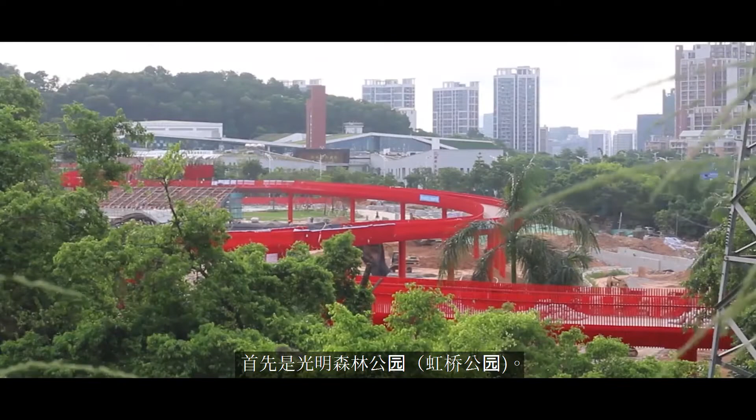For the last 7 years, we've been working with Lola and alongside our local partner, Land+Civilization Compositions, on landscape projects all over the world. By now we are working on 4 different park projects in Shenzhen. The first is a forest park in Guangming. We're also designing one of the most central public spaces of Shenzhen, redesigning Shenzhen's main waterfront at Shenzhen Bay Park, and designing an upgrade for Lychee Park.

I'll start by walking you through our vision for this project. We started by trying to understand the history of the area, how the city has grown and adapted, and how it's approached closer to the river and that heritage.

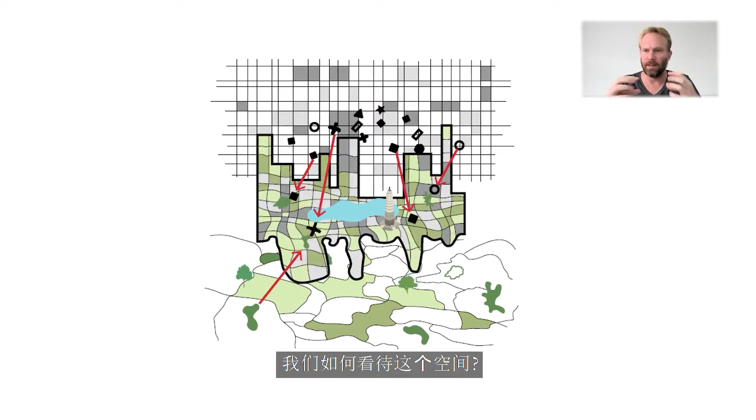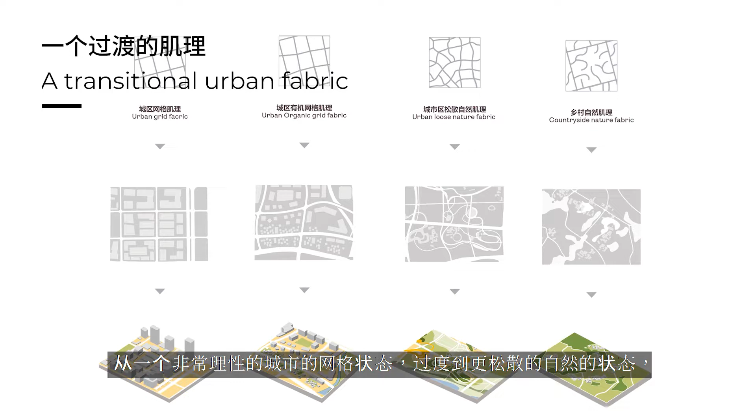Then the question becomes, as the city is starting to grow to the south, across the river, to the countryside, how do we think of this space? What should its character be as part of the city and as part of the world? So we start to think of how the fabric itself can change from a very urban, gridded fabric to something much more loose, like you would have in the countryside.

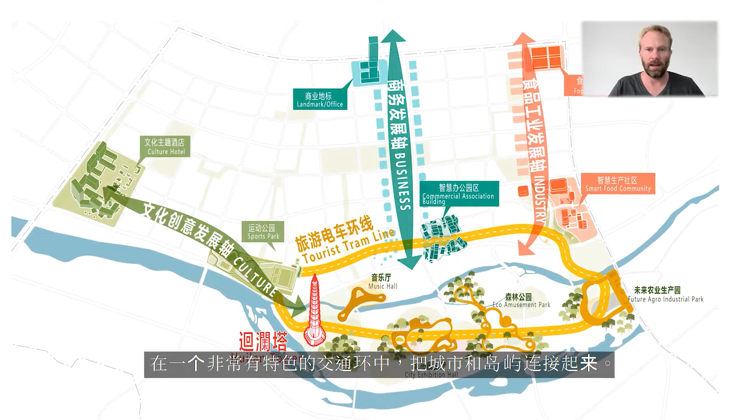But we still want to give a framework to this: key corridors in key identified industries and character, and a key loop for transportation and identity linking the city to the island. Then we have to think of it as a transitional urban system that allows this segue to happen in terms of the water, the open space, and the fabric itself.

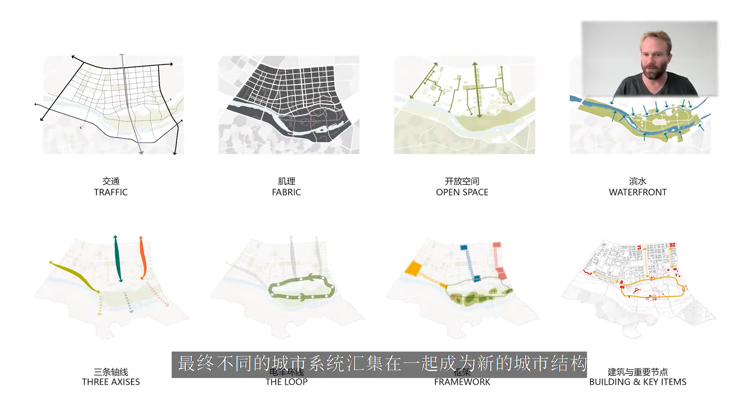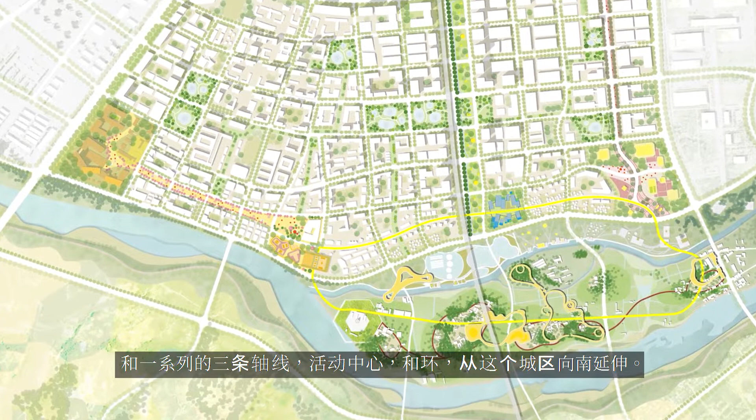This all comes together into a series of principles, and together you can see in our master plan how we think this can give a new identity and a series of key hubs and loops within the region as it extends to the south. Now, of course, the land use is associated with this as well.

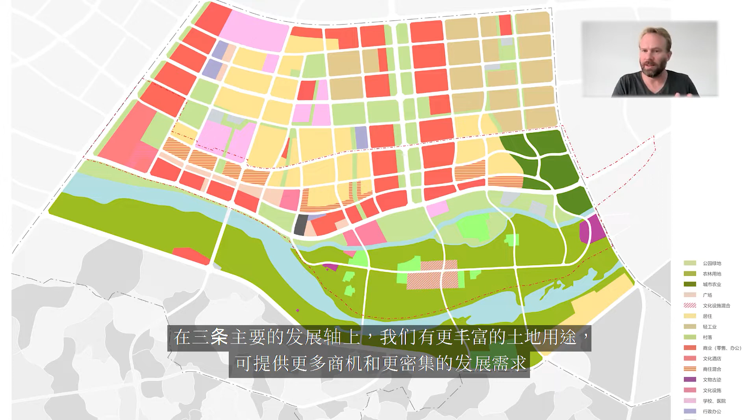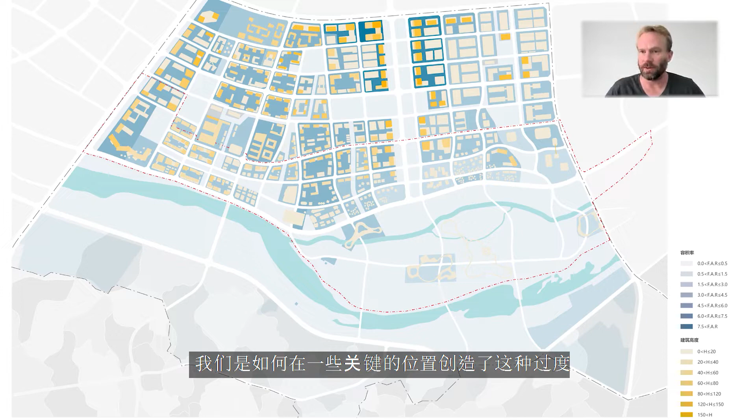In the key corridors, we have more intensive land use that can allow more business opportunities and more density, as you can see in the floor area ratio transition, focusing more intensity towards the transit corridors in certain key areas. You can see how this relates to the transport network, and we provide a new hub, a circular system.

This links a new tourist-friendly area and natural area to some of the new hubs we propose, as well as smaller pedestrian, biking, and train networks.

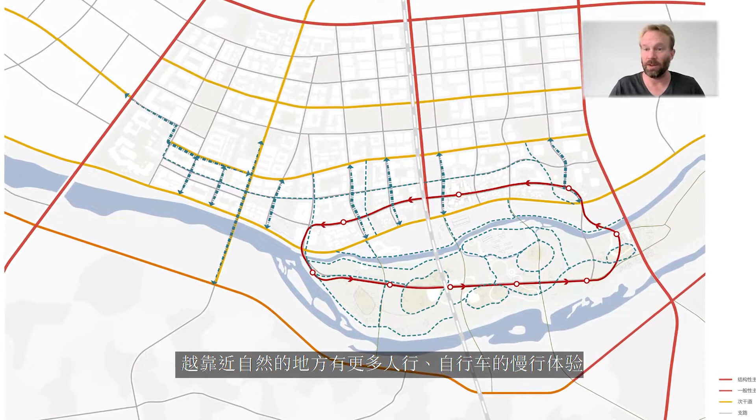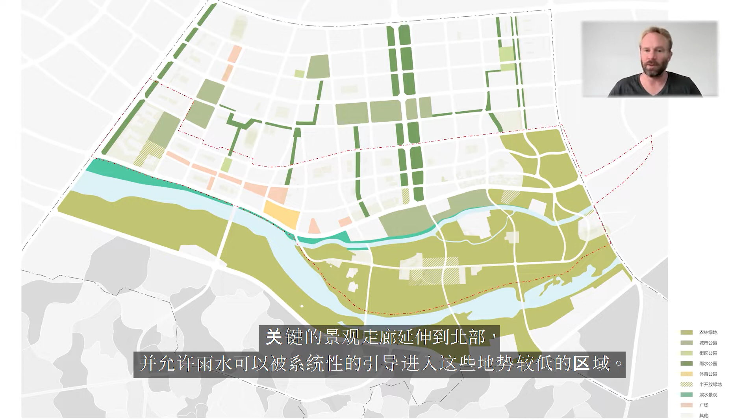The landscape transition also has much more of a strong ecological and natural system to the south, and key environmental corridors extend to the north, allowing water systems to come into those lower areas. So what we see is how we can start to think of a new kind of experience that supports tourism and the countryside, linking Lingpan and the food industry together.

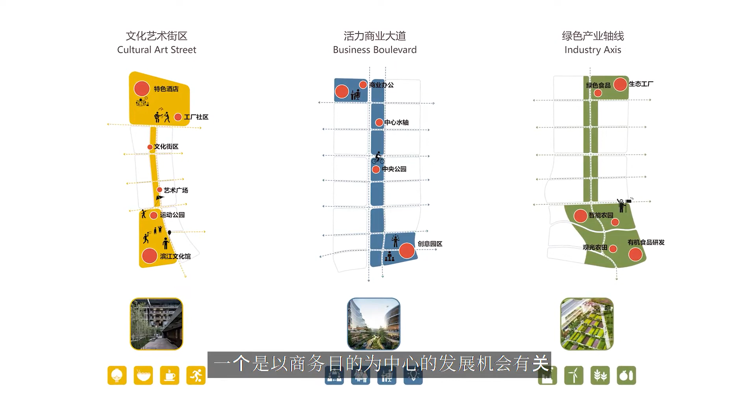These three developmental axes relate to notions of culture and the experiences of that, a more business-centered opportunity, and a more industrial area relating to being productive, including food and agriculture.

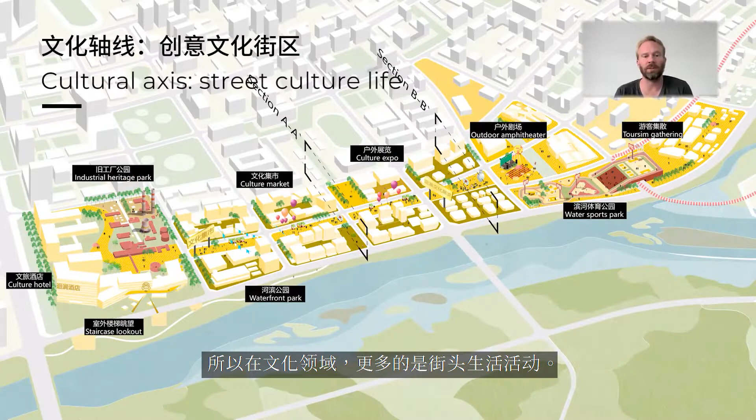Looking at the cultural area, it's more about street life and activities. We think of amphitheaters, culture markets, even heritage relating to industry, and a cultural hotel, all linked together in this corridor.

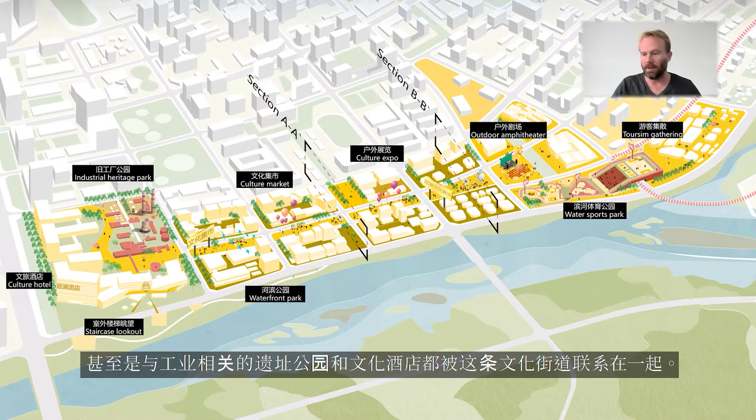You can see a flavor of it here, still a nice outdoor activity relating to the existing culture and providing new amenities as well. The business axis is a place for leisure, nature, and young business to start, still along a beautiful natural axis.

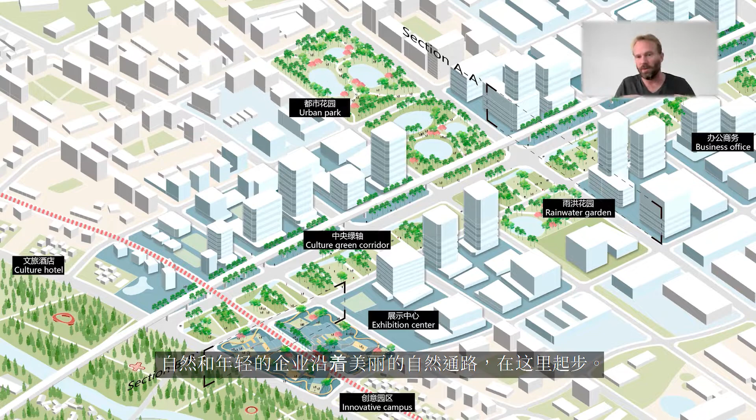You can see here with good transit, allowing people to move easily and still having new construction, but with respect for the heritage of the area.

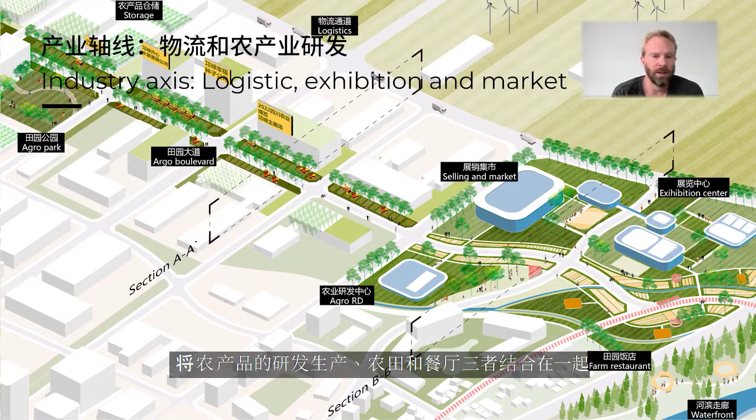The industry area involves logistics, exhibition, and market spaces to sell, R&D for agriculture, farms, and restaurants, all together in one space. You can get a character of it here, some new vibrant spaces, but mixed in with some idea of heritage, of how we can relate to traditional ways of dealing with the landscape and farming.

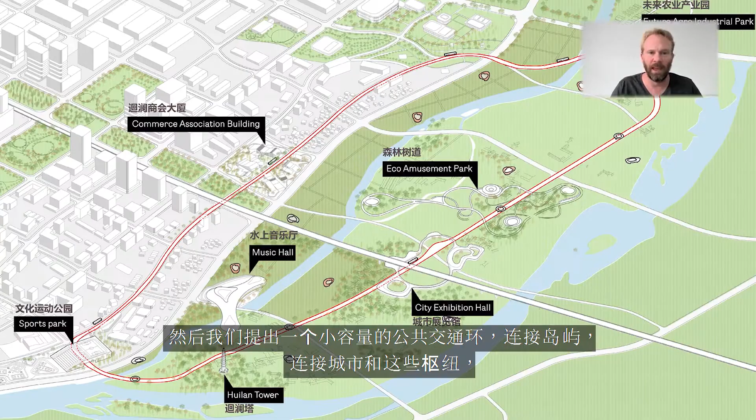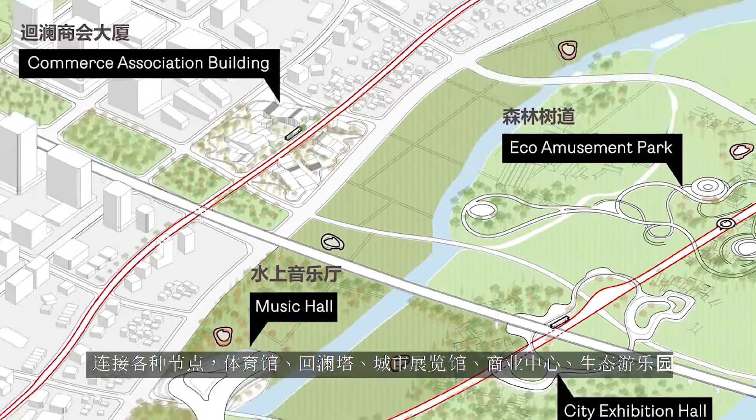We think of this as a low volume public transit loop, linking the island back to the city in these hubs, bringing together the sports hall, the existing tower, the city exhibition hall, commerce center, and eco amusement park, all in one easy loop to transition easily from one to the other.

The loop station design, we think of as a key series of stations that can provide identity along the way, both formally as architectural elements, but also as hubs for the community to come together.

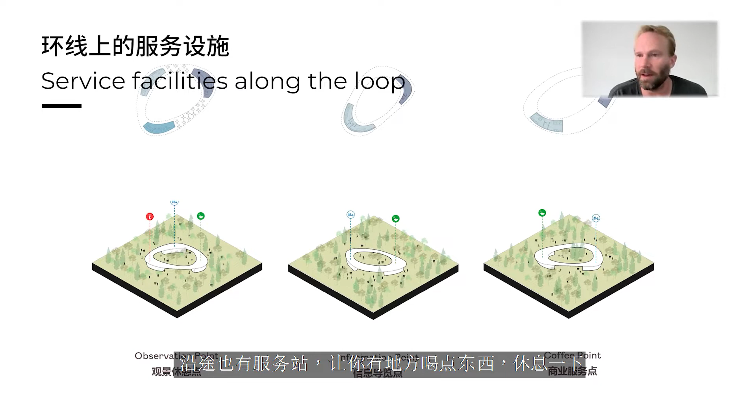And there's also service stations along the way to allow for a place to get something to drink, like a tea, or to get information as you move through the space.

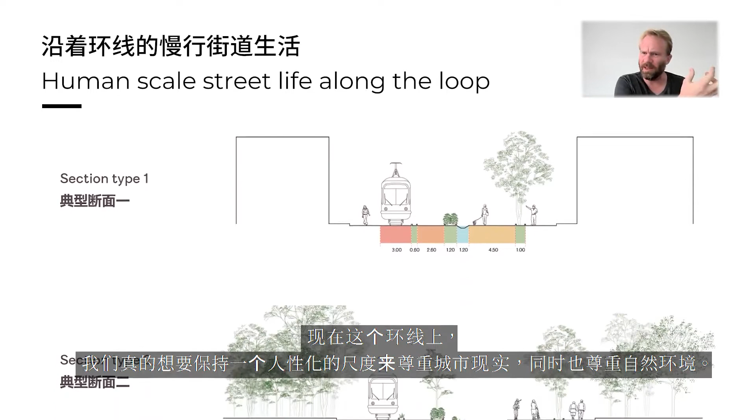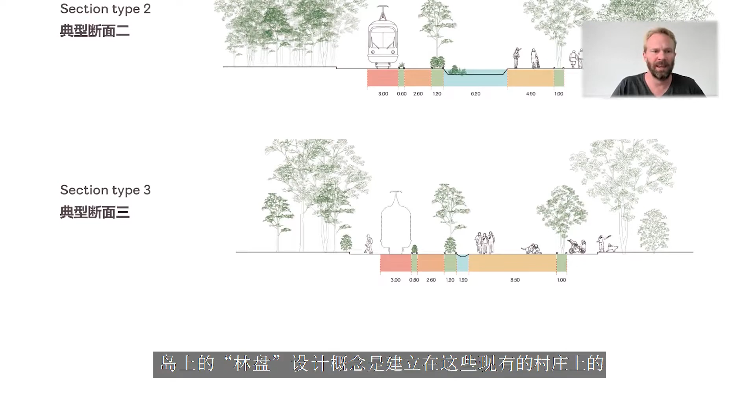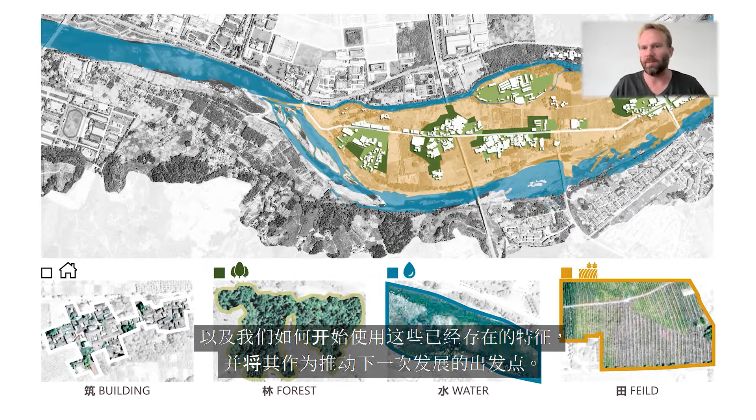Now, this loop, we really want to maintain a human scale to respect the urban reality, but also to respect the natural environment. So a sense of being able to feel very comfortable within a natural system or a more urban condition. And the Linpan concept on the island is building on some of the existing villages themselves and how we can use the character that's already there to drive the next phase.

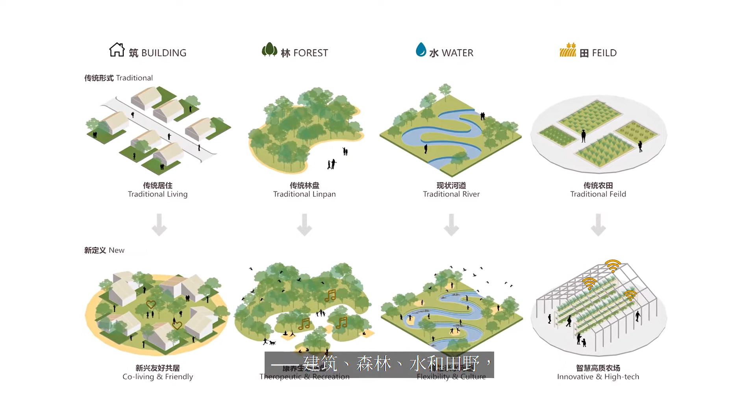So we reprogram the Linpan settlement and use different elements, buildings, forest, water, and fields as the character that both relates to the old, but provides a new vision for the area.

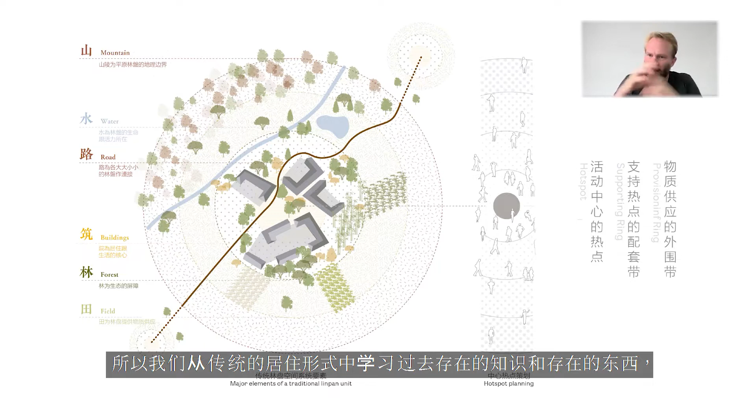And so we're learning from the traditional settlements and what has existed before, and how it has these offsets with a core area and a series of layers offsetting. This develops into our 4 clusters.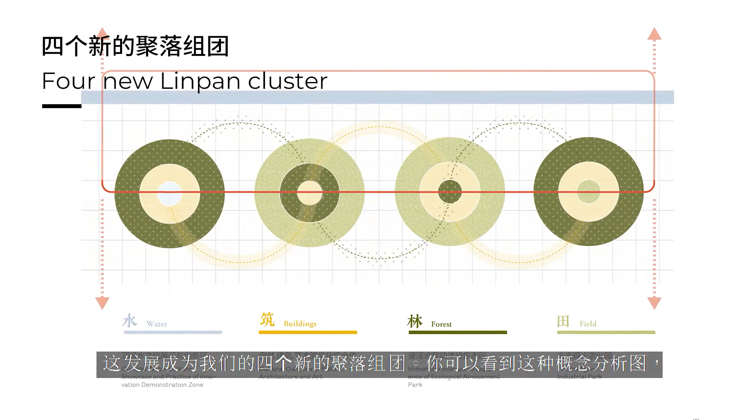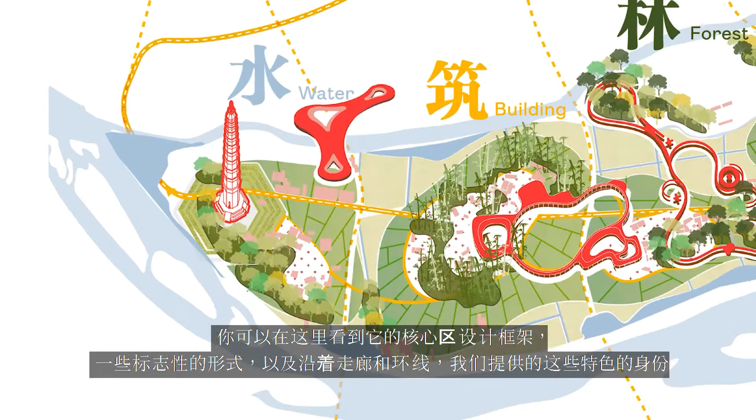You can see the conceptual diagram of how this comes together in these loops and these key hubs along the way. In the core design framework, you can see an iconic form about how we provide these key identity moments along the corridors and along the loops, all tied together to activate this area in terms of culture and nature history.

Now, we have these key thematic routes, some going north and south, some east and west, that allow quick and easy connection within a more local character, but also connect back to the city and to distant places as well.

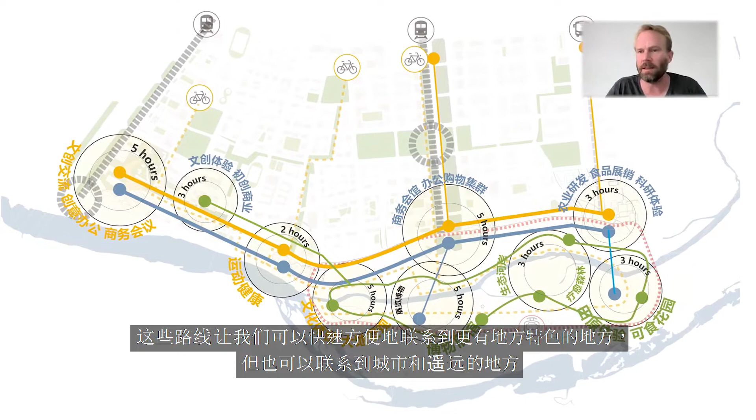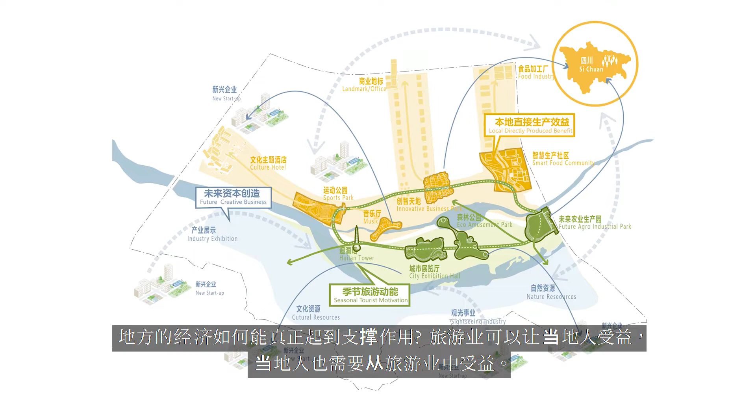And in the end, we're thinking about a notion of circular economy. How can this economy really be supportive? So the tourism can benefit the locals, and the locals can benefit from the tourism. It's self-sustaining, providing business for the area, and cultural experience for locals and visitors.

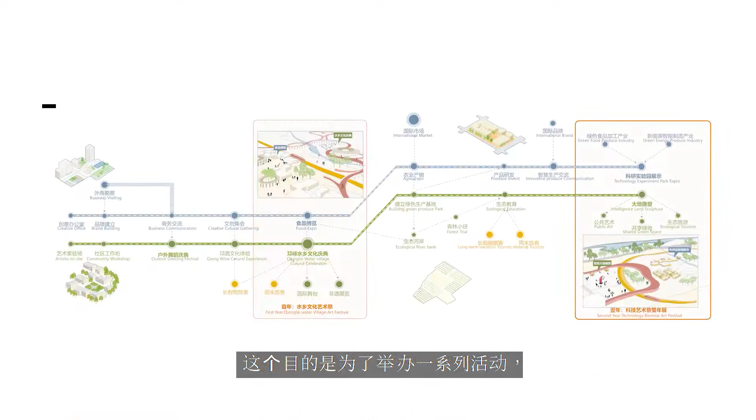And the goal of this is to host an event and to stimulate a synergy between the natural systems, the heritage, and the new business coming together, to think of it not just in terms of something built, but as events.

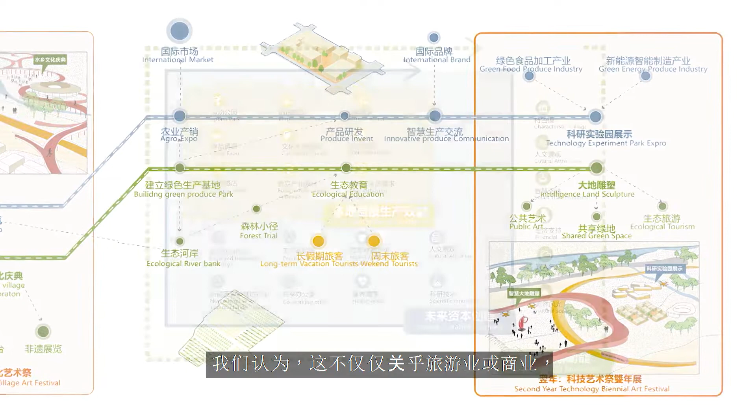And the different interests in different developments. By this, we think it's not just about tourism or business, but how these things can coexist together and support each other to add mutual benefit to all.

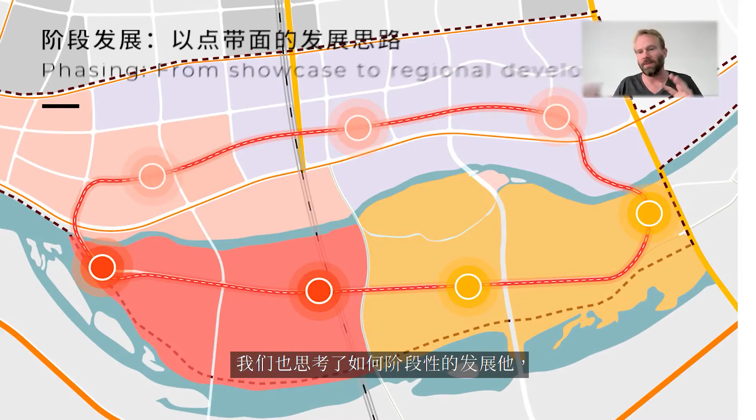And we think of how we can phase this. Obviously this won't happen in one step. It will need to happen a point at a time.

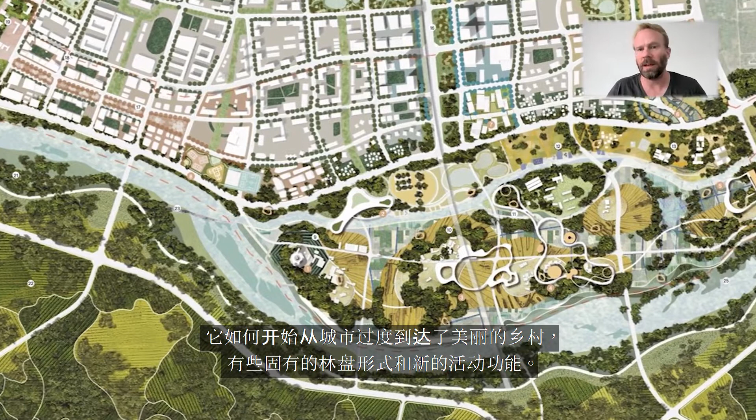Here you can start to see the master plan where this all comes together, these ideas of corridors and visions and gradients and forms, how it can start to look from the city to the landscape.

Now we're going to talk about the 4 clusters that we propose for the island. First, let's start with cluster number 1, which is all about the coexistence with water. It's about the relationship of the ground and soil with the surrounding rivers.

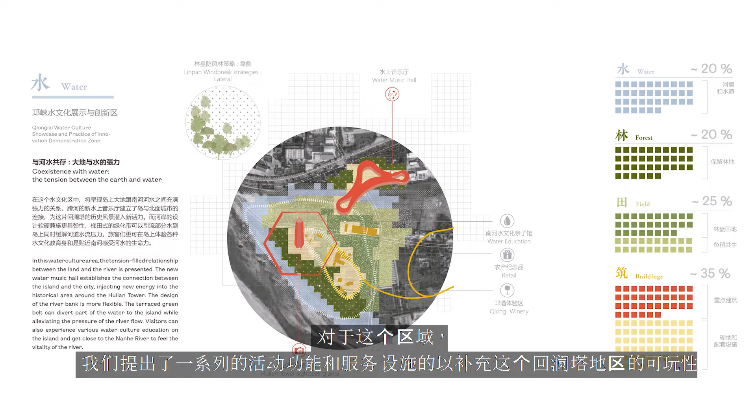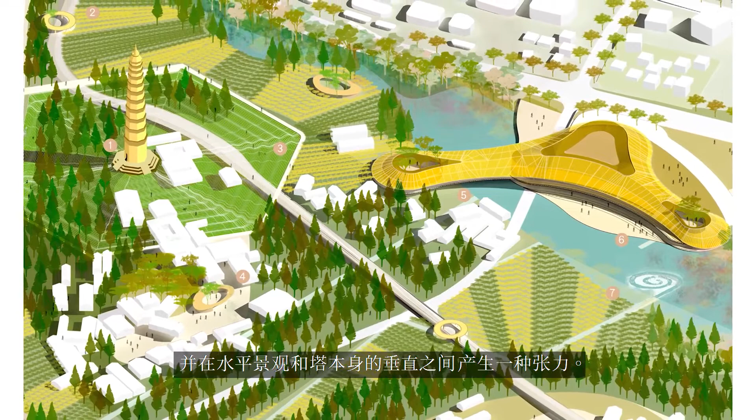For this area, we propose a series of programming that complements the Huilan Tower and generates a tension between the horizontal landscape and the verticality of the tower itself.

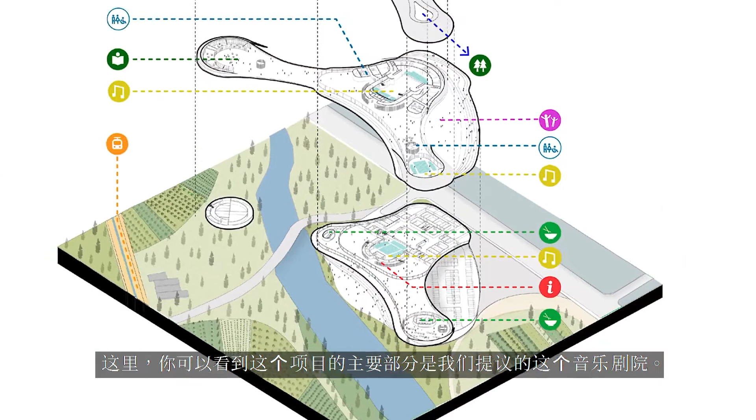Here, you can see that the main part of the program is this music theater that we're proposing. It's called the water theater because it has a direct relation with the river itself.

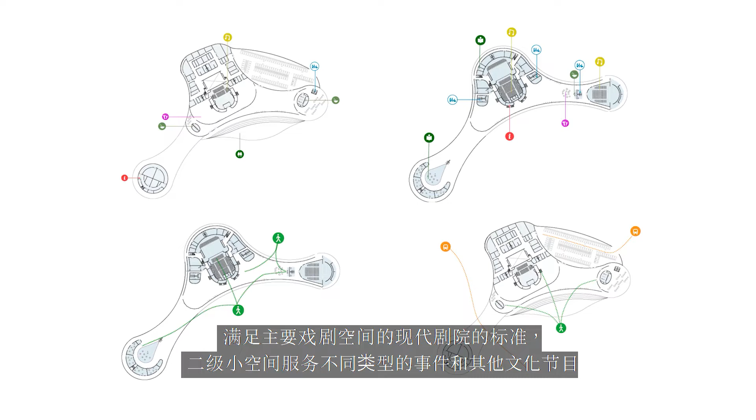And if we see the floor plan, it will give Qionglai 2 important venues: a main theater space with all of the standards of a contemporary theater, a secondary smaller space for different types of events, and other cultural programming that, as you can see in this diagram, overlaps with the river.

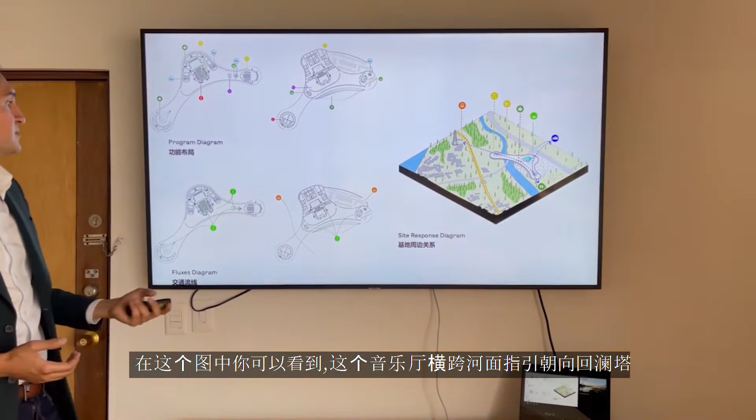It crosses the river and directs to the Huilan Tower as a certain bow to the architectural element. In the image, you can see how it generates an iconic landscape that doesn't seek to overshadow the tower, but highlight it in a better way.

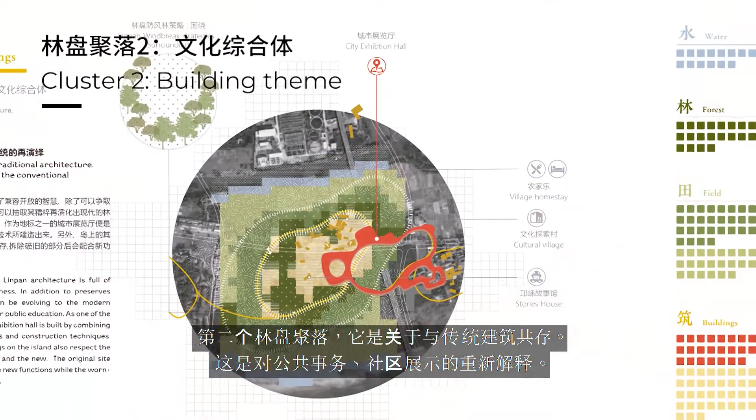In cluster number 2, it is about the coexistence with traditional architecture. It is a reinterpretation of the conventional. We do this by generating this covered loop that entices different types of programming, and through a series of buildings and courtyards that complement the two existing villages.

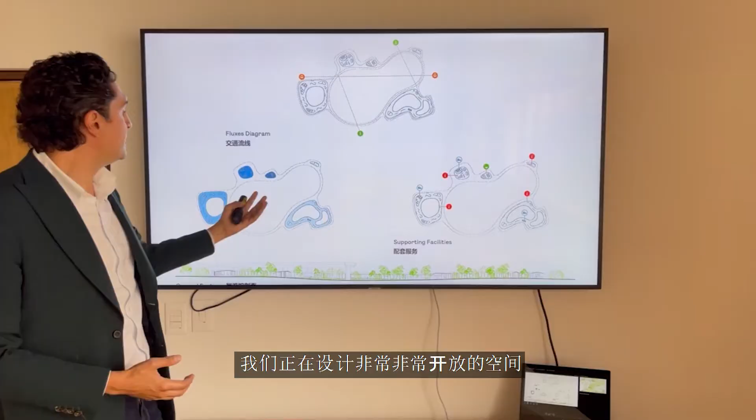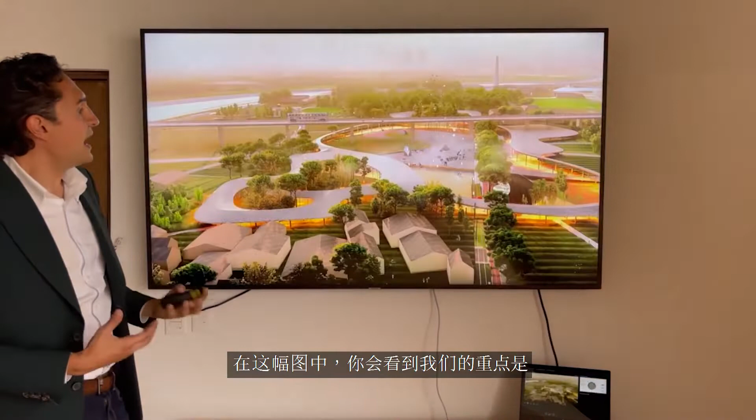Here in the floor plans, you see how we are designing very open spaces that seek to connect the different types of ambience that we have. Here you can see different buildings and how they relate to each other. And in this image, you'll see that our emphasis is about reinterpreting local culture in a contemporary manner.

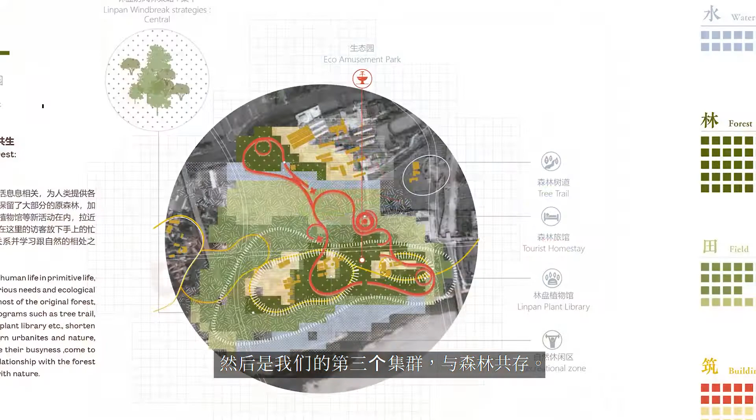Then we have the third cluster, the coexistence with forest. It's about humans and nature and the relationship with nature.

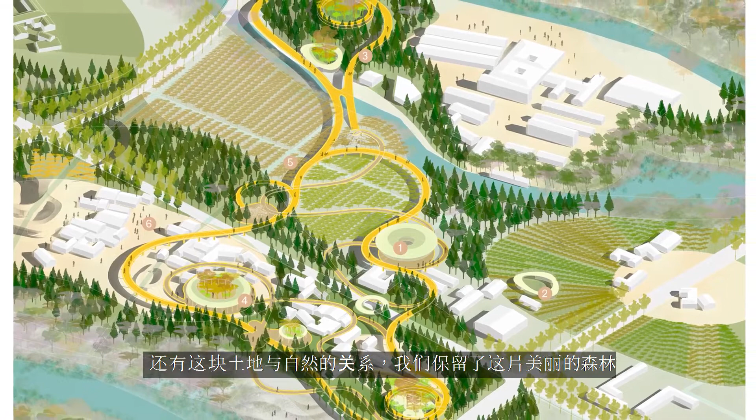Here we're keeping these beautiful forests that exist in the area and complement them through a series of elevated and round walkways where you can connect with nature and enjoy the landscape.

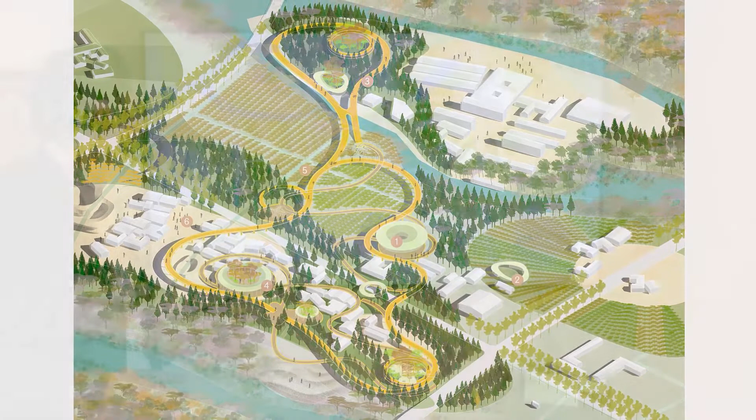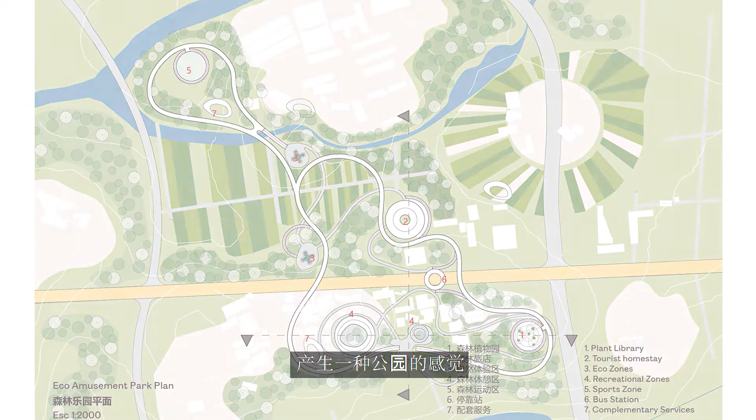Here you can see how these winding paths connect different pavilions and elements that complement the experience and generate the feeling of a park. We have recreational pavilions, homestay, eco zones, and libraries.

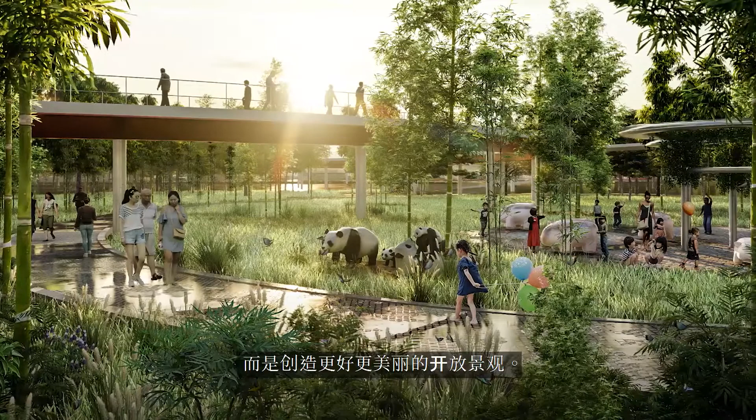Here you can see that we're not trying to impose buildings on the landscapes, but create better and more beautiful open landscapes. And finally, cluster number 4 is about the coexistence with the farmland.

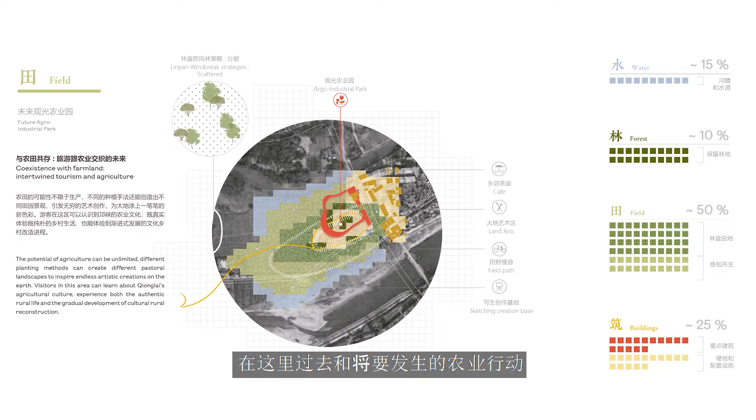It's about bringing tourism to agriculture so that they can learn and enjoy the current and new agriculture that will happen in Qionglai. Here you can see that we do this by designing a building and element that complements the existing road and then curves itself into the landscape so that visitors can actually see how agriculture is made.

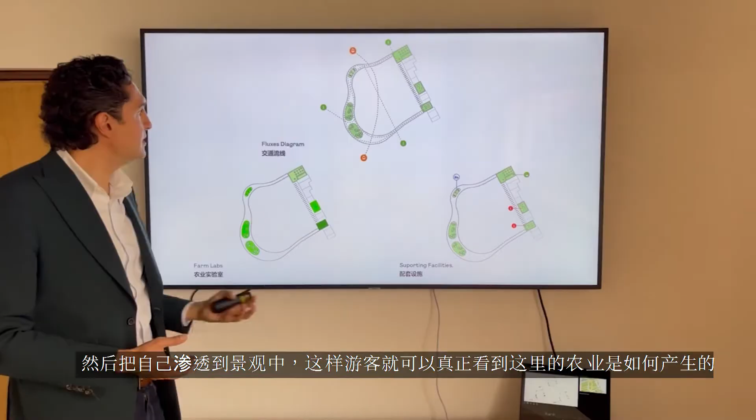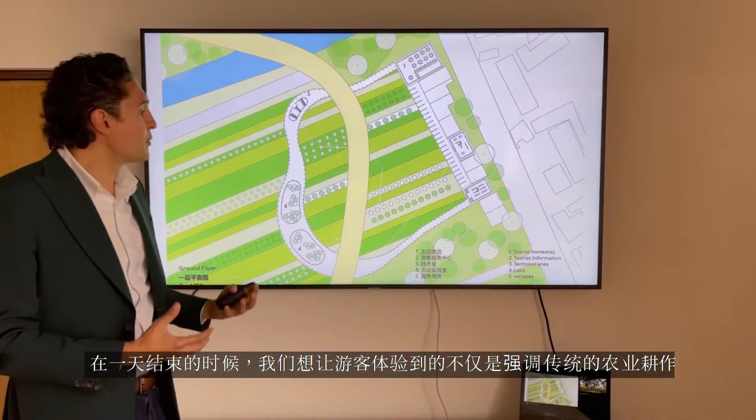Here you can see the different types of programming that are again very open so that we always have direct visual towards the agriculture. And at the end of the day, what we want is to have a visitor experience that not only highlights tradition but also enjoys, let's say, the advances of new technology.

Here you can see that the image shows a landscape that is very particular, that is iconic in itself, and that is complemented by this simple but elegant architecture.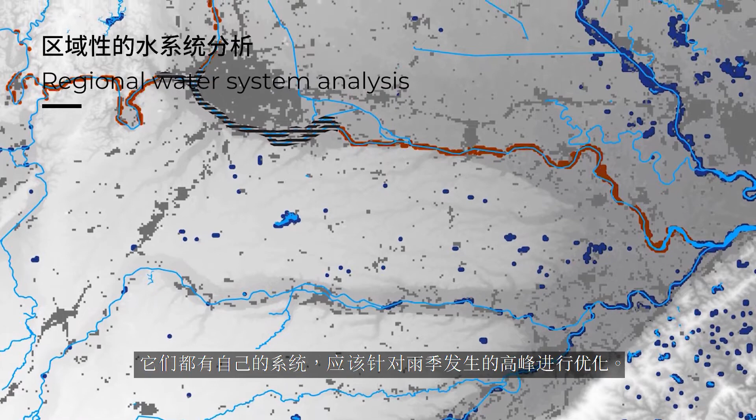If we look at the water system, we can make a division between river water and rainwater. They both have their own system that should be optimized for the high peaks that happen during the rainy season. Let's first look at the river water. For that we can zoom out.

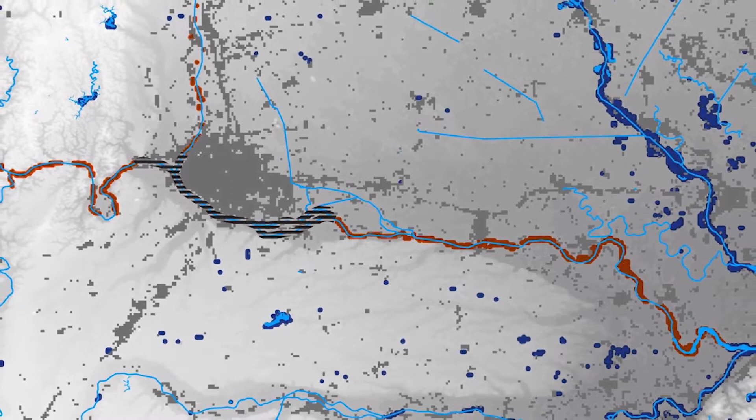Extra capacity for buffering the high peaks is needed. And we can find that space both upstream and downstream in the natural floodplains in the agricultural areas. And therefore we propose not to find that space within the city limits and focus purely on water safety and use the natural dynamics of the water for ecological quality and use the infrastructural interventions for a new leisure network.

In order to make the urban rainwater system as resilient as possible, we've looked at the natural topography and we reserved the lowest areas to temporarily store water during the rainy season. We connect this to the system of pipes and pumps that the city is already realizing. The effect is a meandering blue-green network that contrasts with the grid of the city.

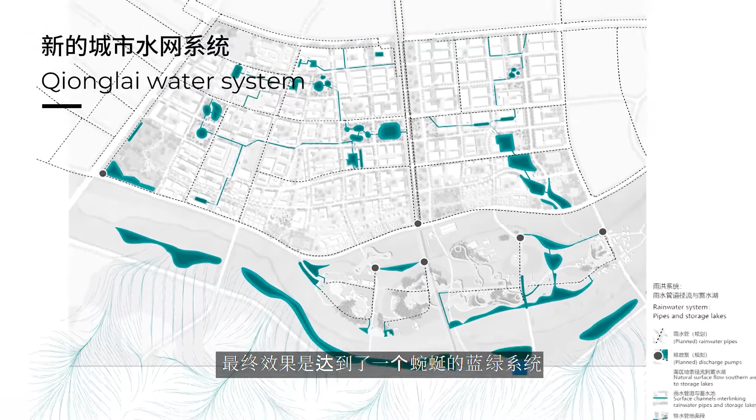All in all, the diversity and the dynamics of the water network in the river, the canal and the urban areas is forming the basis of all public spaces and landscapes in this urban development.

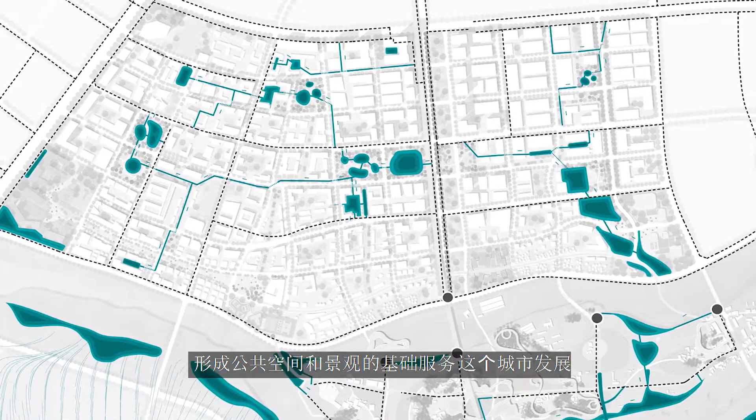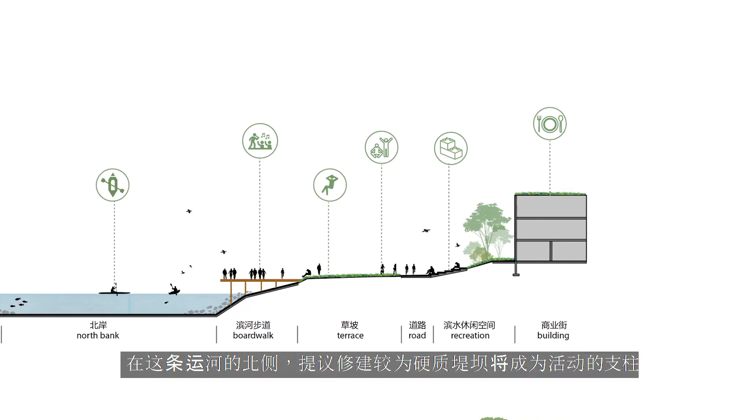The canal north of the island will have a park-like atmosphere with a fairly steady water level. The new dike that's going to be constructed on the north side of this canal will be a backbone for new leisure activities, both on the land side and on the water side.

On the south side of the island we have the river with its natural dynamics that will be used for its ecological potential. By creating slow gradients, we introduce different habitats for plants and animals.

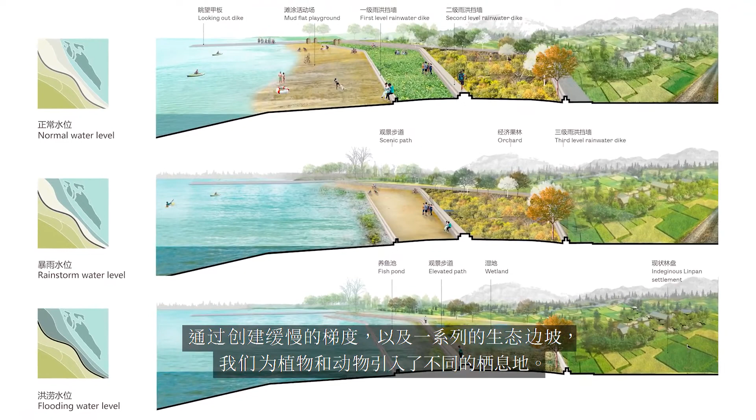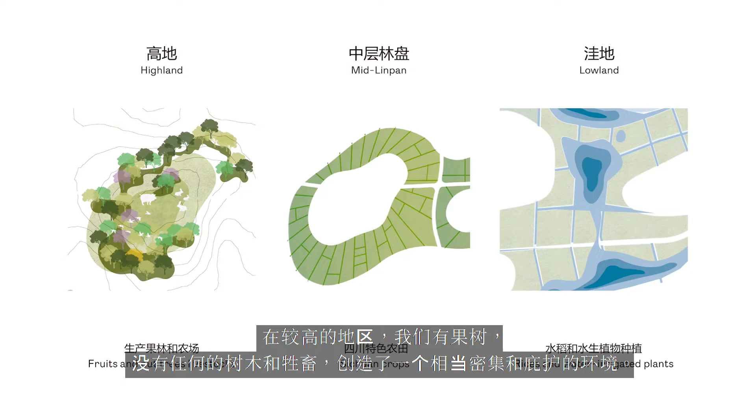If we look at the island itself, we propose to have a productive landscape that is adapted to its local conditions. On the higher areas, we have a combination of fruit trees, nut trees, and livestock, creating a fairly dense and sheltered environment. On the middle ground, we see space for the

traditional Linpan system, growing crops for the Sichuan kitchen. And in the lower areas, we see space for water-related productions such as rice fields and fish ponds. Altogether, these different productive landscapes create a wildly attractive variety of color, taste, and texture.

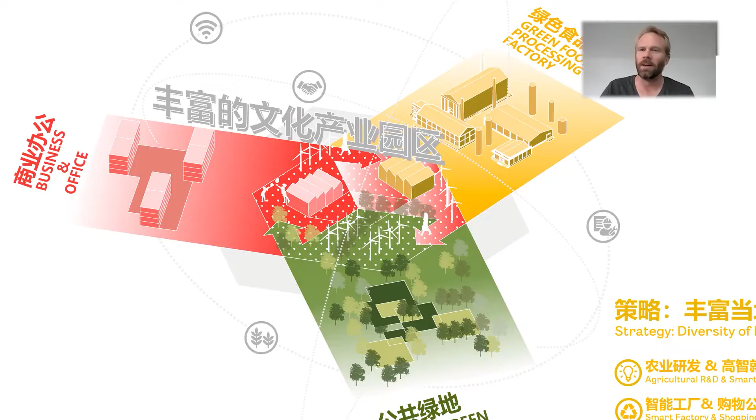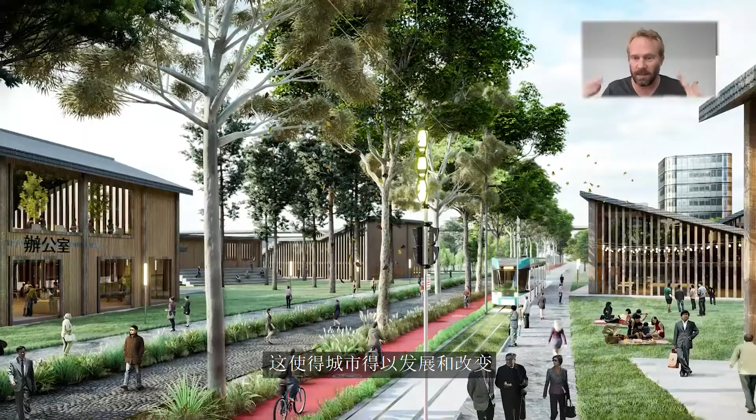So what does all this mean? In the end, how do we make the semi-rural area of a self-sufficient city where new generations would like to stay? It's about coexistence, being together, about living and producing. The idea that we don't just make things over there and we live here, we mix it together. It's a shared experience, and this allows the city to evolve and change and become a truly identifiable, special place.

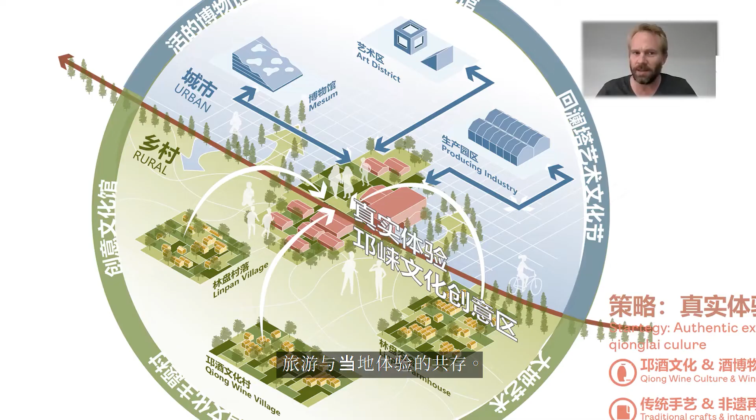So we can play, grow, make as one, layered together. How do we attract more young generations to develop a local industry in the future? The coexistence of tourism and local experience. Tourism doesn't need to just be a simple, silly thing that outsiders do.

It can provide quality to the locals. It can embrace the reality of what is there and enhance the experience of the people on the ground, as well as giving a much more qualitative experience to those coming into the region. This again sets a tone for the evolution of Qionglai.

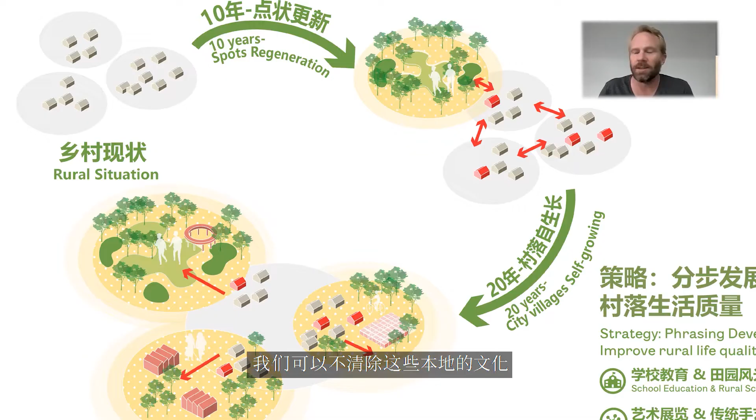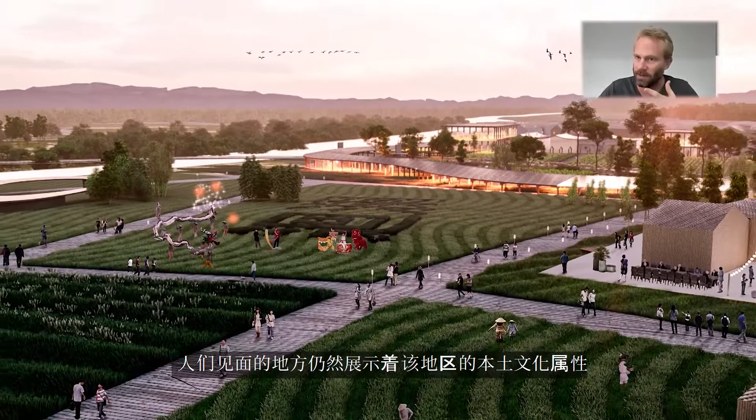And lastly, how to welcome a future development without losing local qualities and identities. That's because we don't need to remove the local heritage. We can actually mix the local existing character, both in terms of landscape and buildings, together and allow a new form to come to mingle and frame new spaces, places where people can meet that still show the heritage from

the area, but also show a fresh take on that heritage and what it can be. And by allowing this coexistence, we can remember the past and respect it, but also use that past to look forward to the future, to bring forth a new regional identity that's still based on its roots and its core. And in the end, we see this as the Qionglai city evolution.